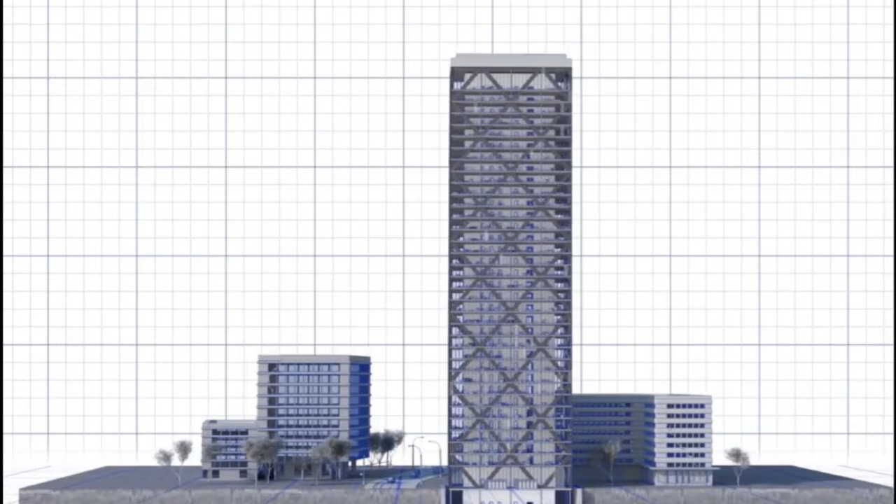How do engineers prevent buildings, most especially super tall structures, from swaying too much under strong wind forces and earthquake forces? Well, if you want to get an idea about this, then you should stick to the end of this video because we are going to be discussing the physics behind wind and earthquake building resistance, and also how engineers manage to control vibration on super tall structures.

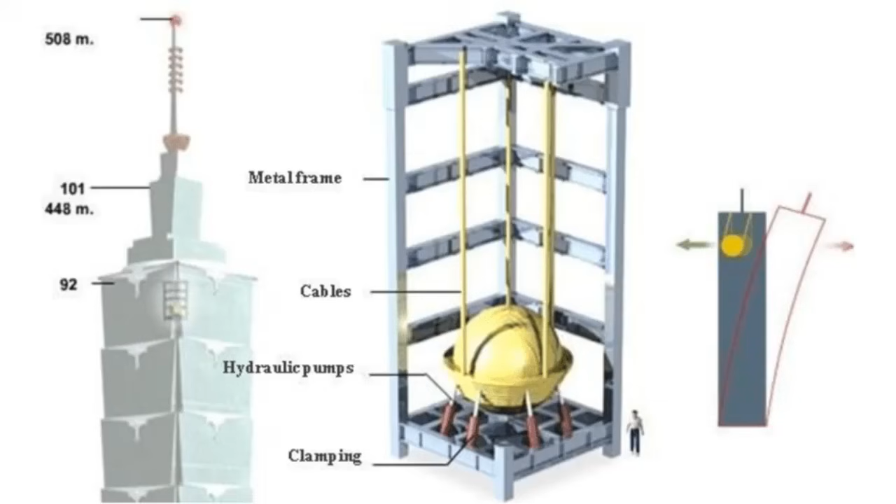And as structural engineers, we don't want such a scenario to occur because just as we focus on the structural strength, we also take the serviceability aspect of the structure into account. So, because of this, engineers designing skinny and tall skyscrapers are now installing giant counterweights, also known as damping systems, at the top of towers in order to offset or counteract building motions. One of these damping systems used on buildings is called a tuned mass damper. This tuned mass damper is made up of steel or concrete weighing anywhere from 300 to 800 tons.

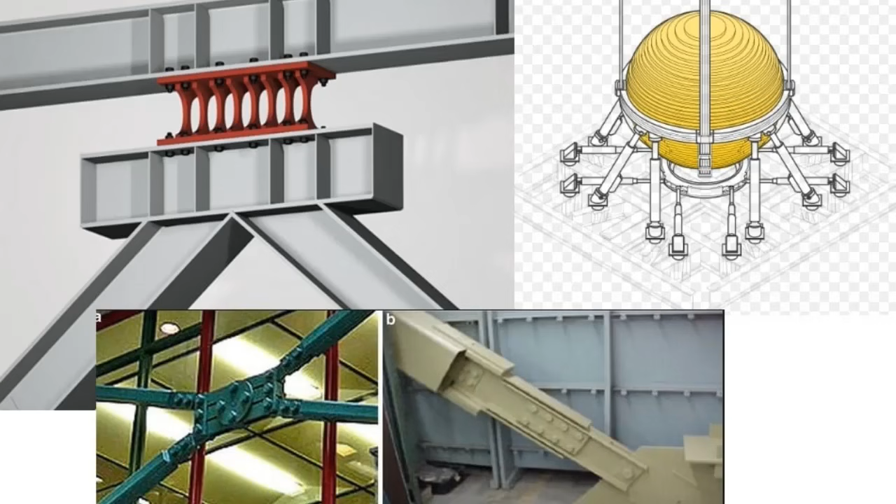Let's see how this tuned mass damper actually works. A tuned mass damper is a mechanical device which is designed to add damping to a structure for a certain range of exciting frequencies. This extra damping will reduce the movement of the structure to an acceptable level. These dampers are connected to the structure walls by a system of pistons and spring mats. The damper acts almost similar to the shock absorber in your car. During high wind, it pulls the building back towards its original position.

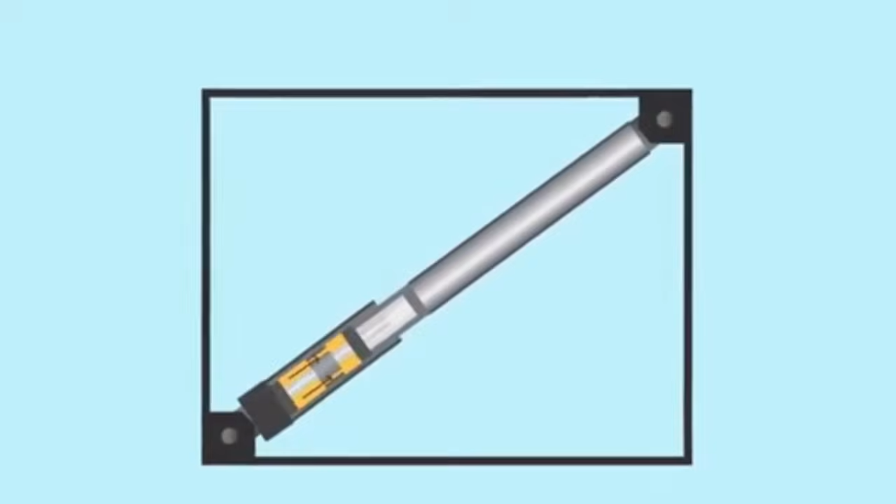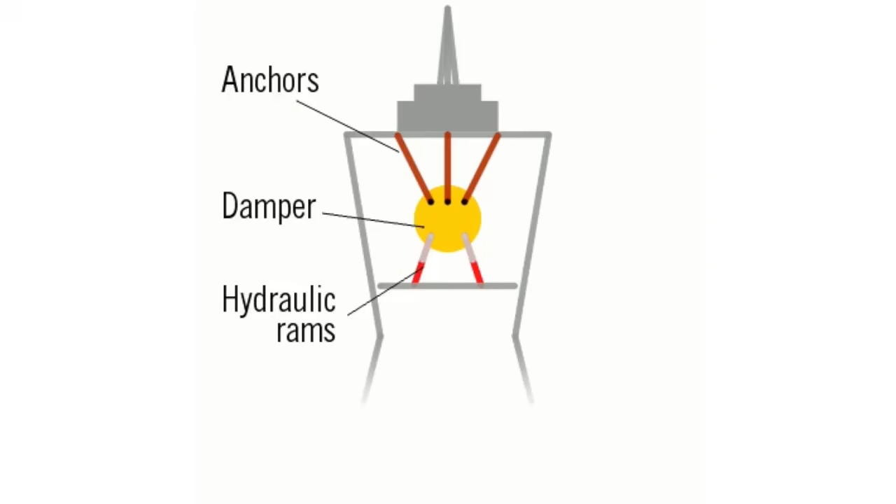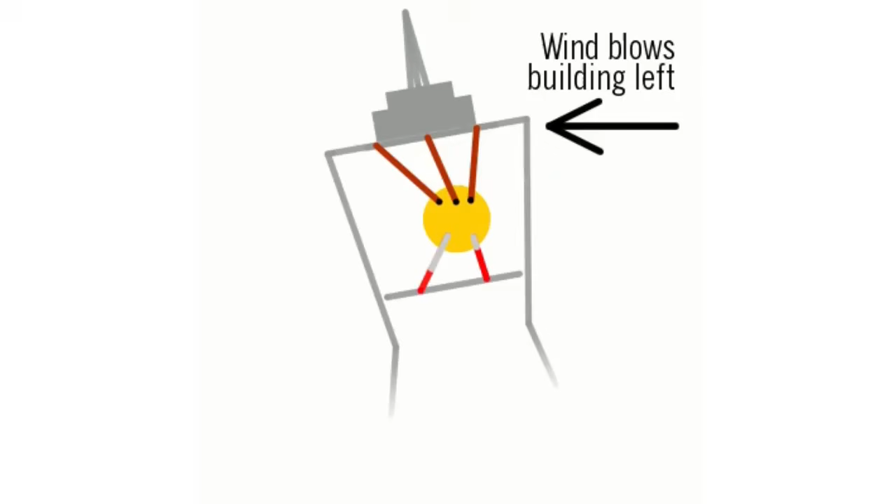So, a tuned mass damper contains a mass that is able to oscillate in the same direction as the structure. The oscillation frequency of the mass can be tuned using springs, suspension bars, or ball transfers. When the structure starts to oscillate, the mass of the tuned mass damper will initially remain stationary due to inertia. A frictional or hydraulic component connected between the structure and the tuned mass damper mass turns the kinetic energy of the structure into thermal energy, which results in a lower vibration amplitude of the structure.

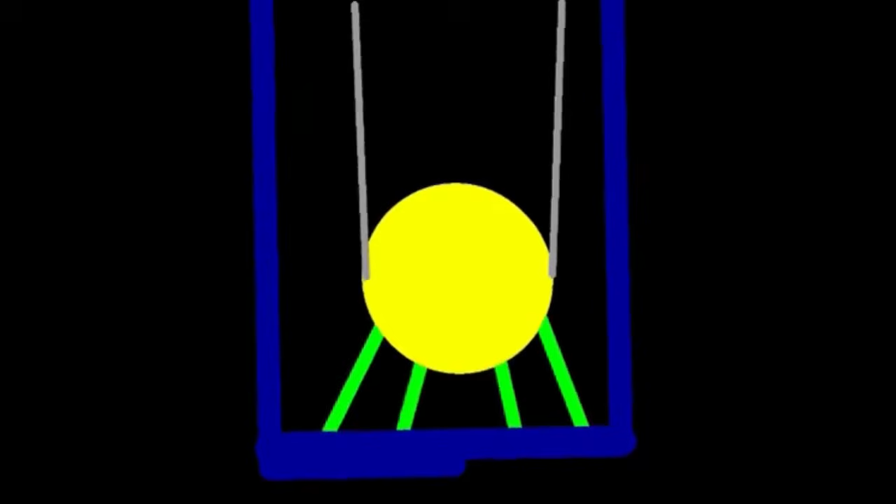And the design of a tuned mass damper will depend on the oscillation frequency, the mass of the structure, the direction of the movement, and also the available space. So we can say a tuned mass damper is a device mounted in large structures such as tall buildings and long bridges in order to reduce the amplitude of vibration caused by environmental forces.

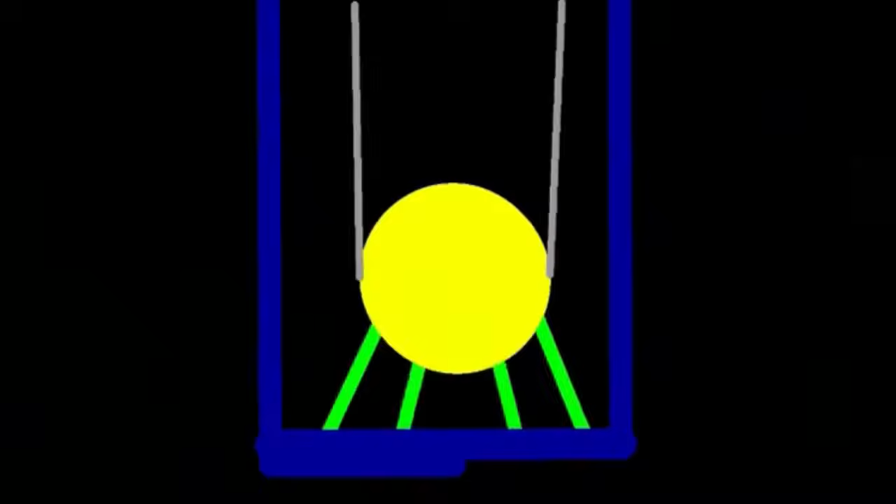If you visit the Taipei 101 skyscraper in Taiwan, you will see a giant golden ball placed beneath the observatory deck. This is the wind damper, and it generates reaction forces to negate shock or vibration caused by outside forces, so that people inside the skyscraper can live and work in comfort without getting scared. These tuned mass dampers are typically constructed of large steel bodies and mounted to move in an opposing direction to the oscillations of the structure.

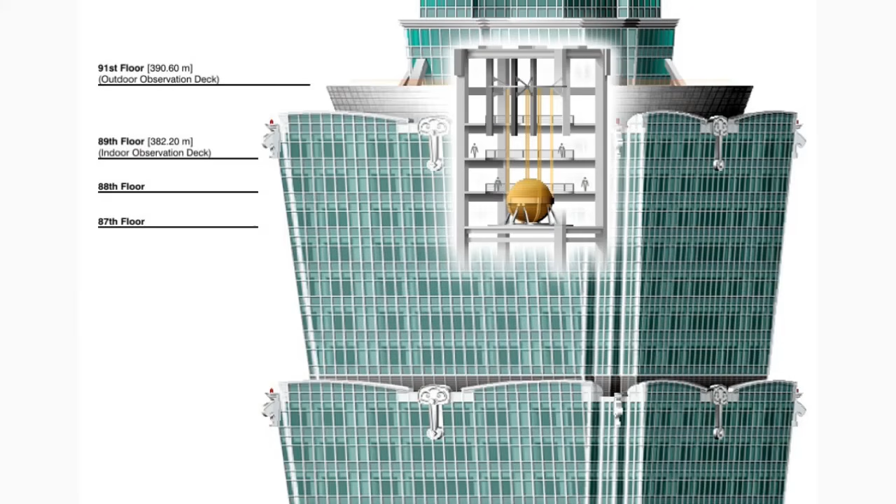It is important that the vibrations caused by wind load and earthquake load on structures such as tall buildings and bridges be damped because it allows them to remain stable. And over the years, tuned mass dampers in buildings and bridges have been responsible for keeping structures safe and also reducing the amount of damage which harsh weather conditions can wreak on those structures.

If you also visit most skyscrapers today, such as the CN Tower in Toronto, the Crystal Tower in Osaka, the Centrepoint Tower in Sydney, and the Citicorp Center in New York, you will find many of these wind dampers, which are placed almost at the top of the skyscraper. So this is how engineers can use tuned mass dampers to reduce vibrations on structures.